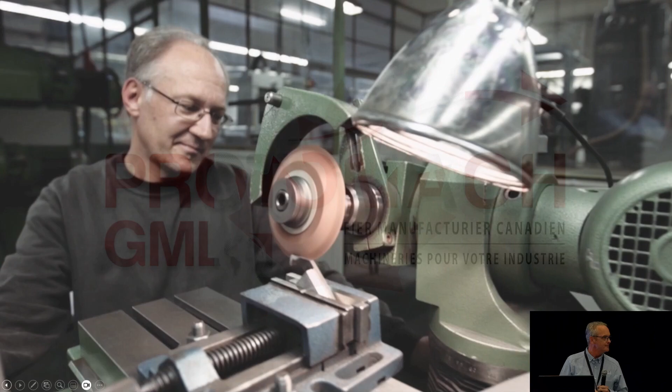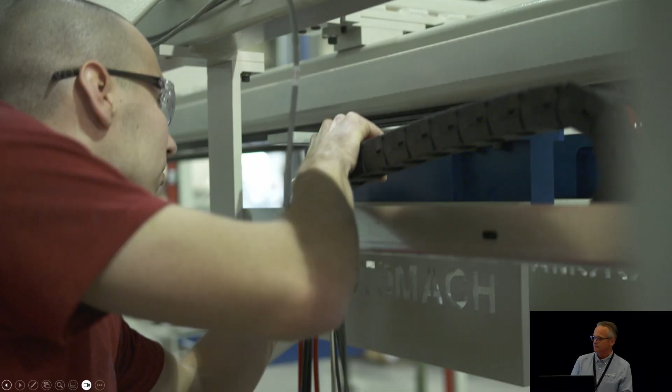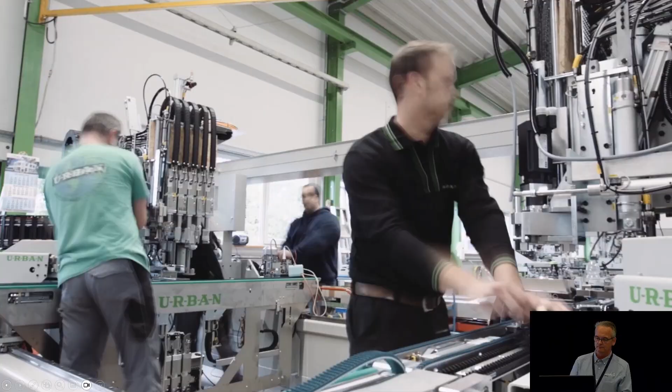We are the Protomach GML team, a proud Canadian manufacturer located in the heart of Quebec. GML's story began in 1984 and Protomach's in 1996. In 2024, to prepare for the next generation, the company became Protomach GML. In early 2010, we were just over 10 employees. Today, we are proud of our growth and now have nearly 40 employees. Partners with Urban for nearly 30 years, did you know that although Urban is a German manufacturer, it has 2 manufacturing plants in Canada, one in Fredericton, New Brunswick, and the other in Cambridge, Ontario.

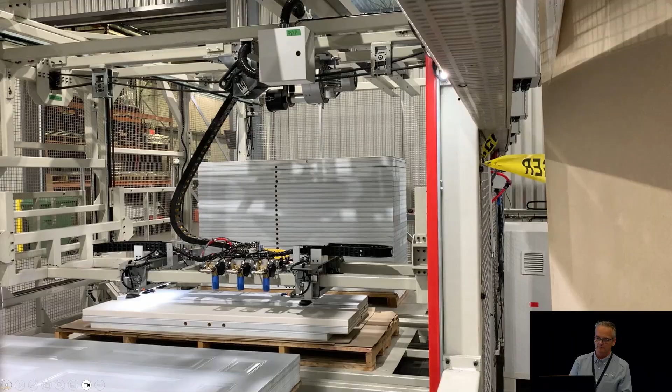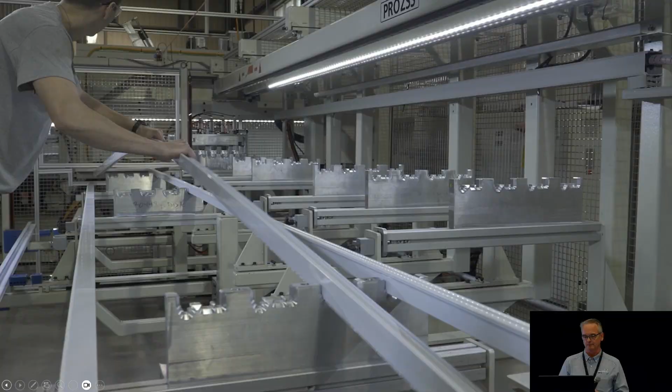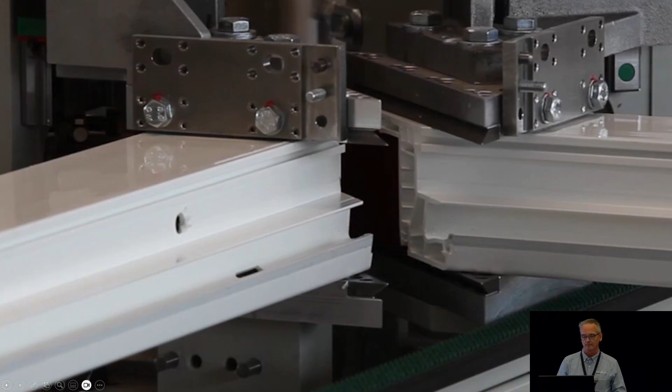We manufacture machinery and industrial tooling specialized in the doors and windows sector. We have the equipment to work with PVC, fiberglass, wood, and light alloys such as aluminum. Industry 4.0 has been part of our operations for many years now. Automation is our everyday reality. We do everything possible to maintain full control over our production. Like you, we cut raw materials, machine them, weld, assemble, program, and fully commission the equipment at our facility. Clients want trusted suppliers who offer solutions tailored to their needs and who will support them over the long term. We don't claim to be perfect, but we dare to dream it. Welcome to Protomach GML, the team that makes a difference.

Okay. Just something I want to talk about. We introduce Urban a little bit in the video because for 30 years we supply Urban machinery. And this video connects with the fact that it's completely Canadian. I'm from Canada, I build machines in Canada, and Urban also has 2 plants in Canada. That's why I'm a part of Urban, and I will say I'm proud to be a part and the dealer of Urban for almost 30 years. It's one of the things I want to say.

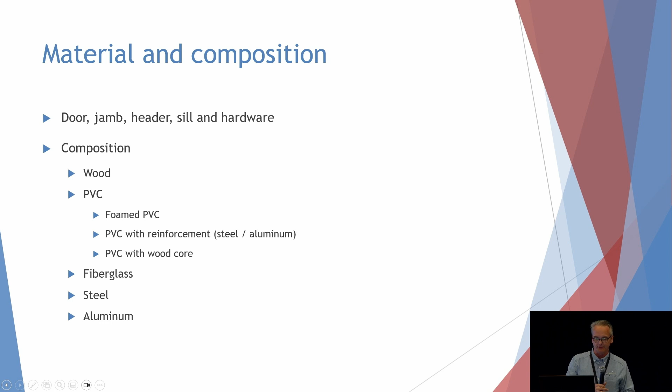Okay, now the material composition of the door, almost everybody knows it: the header, sill and the other way around. The composition we have is wood, PVC, some variation of PVC foamed, reinforcement steel, and sometimes you have wood inside. It's like the wood is there and the mullion coming through, all around, and the fiberglass, steel and aluminum. But that's just for reference for what we will talk about.

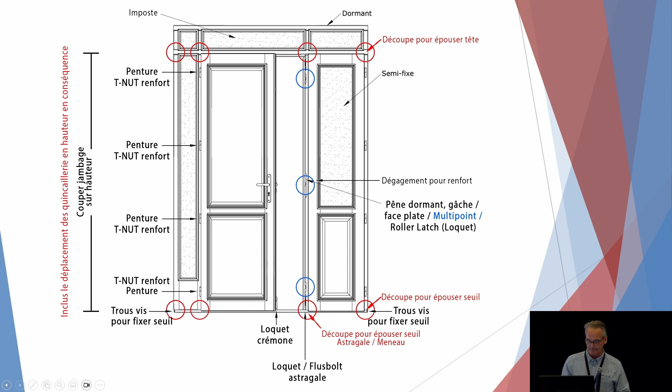We have a small manual machine. It's an online machine we will use. The step-by-step machine is like in the shop, you will have the machine continuously used for doing the door, like the horizontal table, and you will push, or the door can move automatically too. And sometimes on one table we will do two different actions we need on the door, for example doing the installation of the light and switching the door, because later we need to have the door at the opposite side to install the hinges all around, or something we need.

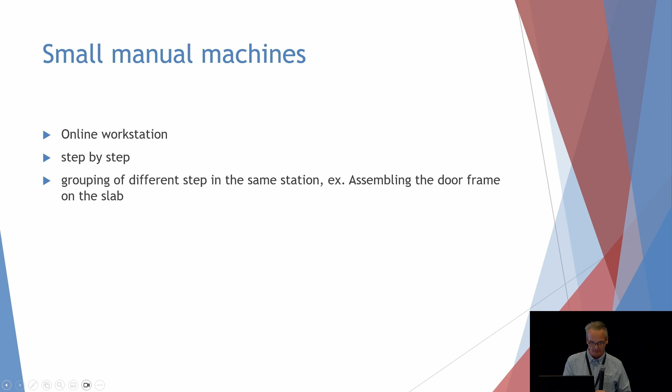Question? It's easy. Yeah.

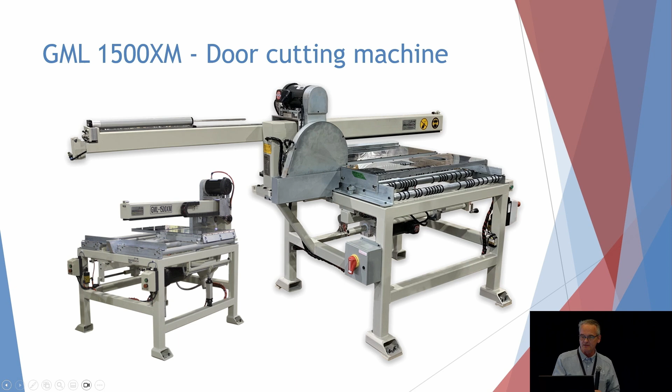To explain the machine now, the machine we have on the screen looks like that. It's one of the machines we build, but this machine probably exists not only from us. The machine can cut for renovation. Sometimes the height of the door needs to be lower and we need to cut. And also you will see under this machine, we have a blade that can cut from the bottom to the head. And some customers do the side light with this cutting option, using the complete door for the side of the door. It's not a feature customers normally ask for many times, but it's an option we have. But the machine cuts on the two sides, the height and the other way.

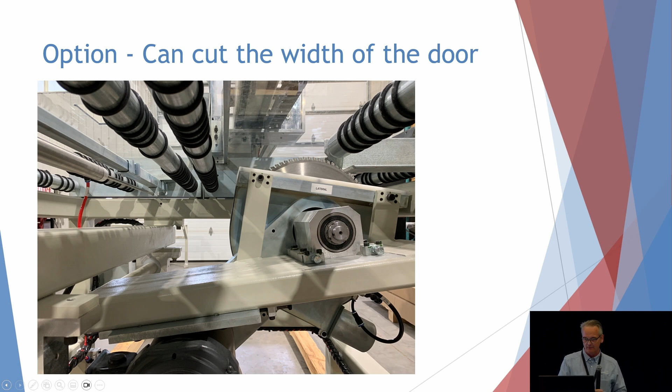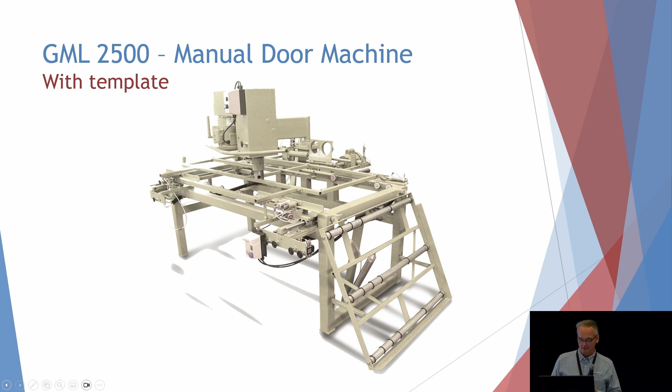But that machine is still in production, but lower production than the other. The other is the GML 3000M, and this is for the slab too. And this machine is like the base machine to do a CNC when we do a machine, CNC at the shop. But this machine is really with the flip stop.

We will push the bridge over and cut the hole for the light, and it's a completely manual machine, but a stronger machine, not with the articulated arm over, and that thing, it's maybe one other option. But like I said, some customers use that, but it's not a big production in 2025, because the need is really different.

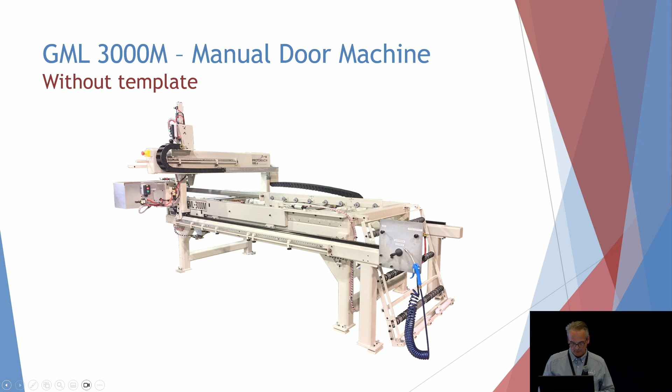And we do some modification for, like you will see after, the positioning middle screw where the hinge is, to be able to have the right spot in the middle. It's like a dimple mark system. We will mark the screw. And this machine will also cut, going to change the tool, have a blade, and cut the height of the door, and continue after.

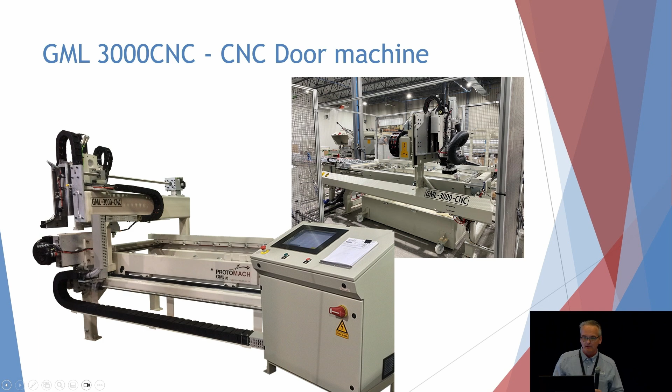And good? Yeah? No, oh yeah, no, I just have one.

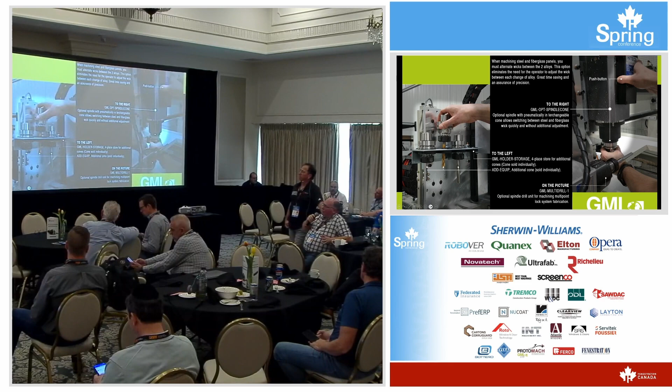When do you want to go to full CNC, Jean-Francois? Is it a matter of just your volumes, or is it what you're doing? When do you start talking to a customer about, okay, you've been doing it this way this long, and now it's time to go all the way up? Normally the customer asking for the CNC already used the 2500 or the manual machine. He uses it, but the capacity needs increased, and he will try to have, like on the screen, the manual changing tool faster, and it's easy to operate.

And when he goes there, the customer normally does close to 5,000 slab doors a year. It's like the number. And I'm proud, because I saw in the exhibition room on the other side the brochure of Novatech, but we have a line at Novatech. We do 210,000 slabs a year on the line. It's a huge line, and we prepare all, but the number of Novatech is completely different.

It's not what the majority of people have, but at the 5,000 number, normally the CNC is a good number, and it's also the manipulation, the paint, and being sure everything's correct, and they have the quality control of what the product is going to come out as, ready to sell, I would say. Good answer? Thank you.

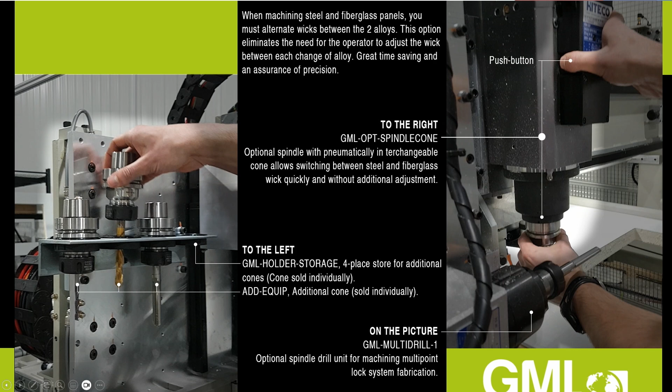Okay, and the picture you have in front of you, we present almost the option manually changed, but like I said, we have an option like a tool changer we can use automatically too. This is the dimple mark for the hinge screw. I can come back with the arrow, with the click. I can change, yeah, back.

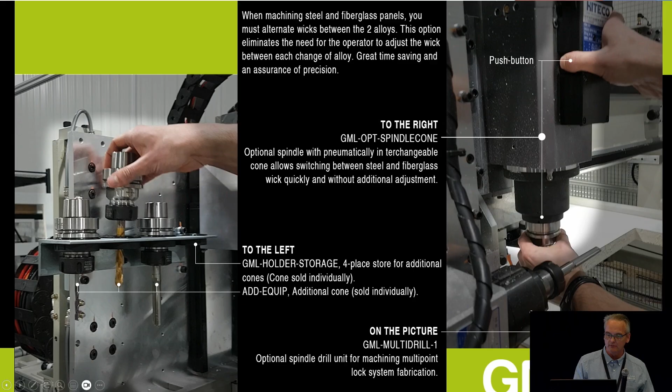Okay, but on this machine, somewhere I would say at the entrance of the machine, I don't see it anywhere. But this system is going to be opposite the operator, and the slab comes through, and you will have a stop. It's like a reference with the bridge we will touch, and the feature will punch on the cavity where the hinge goes, and we will have the center of the screw.

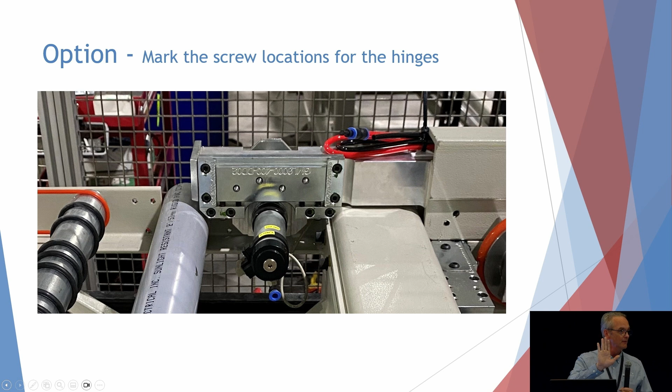Not all customers ask for that, but it's just to be sure the screw is not this way or this way, and will be straight with, I will say, the 82 degrees of the screw, and really flat with the hinge. That's one of the features we have for the hinge. Okay, that thing for me is an important thing.

The machine is a machine, but technically, about the bit, I have many questions, and the customer is trying to have the best and do as many slabs as possible with one bit, because it's not a cheap bit, and he wants to make many slabs with it.

The first one is one flute, but when we compare the upper and the lower, you have the compression one. The black one is because you have a cutting push down on the upper position, close to where the bit will be on the spindle, and down, the compression will pull up at the opposite.

The two pressures will be at the center of the slab. And now, the good option for that is because when you're cutting the plate, it sticks on the urethane, and it will stay, and it doesn't really come through and get loose, I would say.

And the compression bit on the CNC is the best when we use it, and also on the other kind of machine. But sure, when we have a compression bit, on the previous machine before, the manual one, this machine had the oscillating bit going up and down so the wear would change place and give a longer life to the bit. But the compression bit is normally the best for what we need.

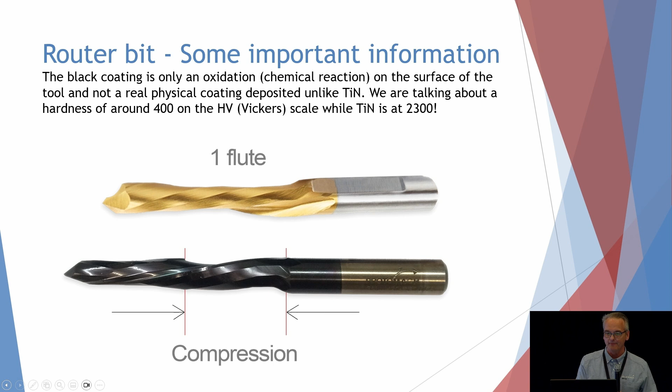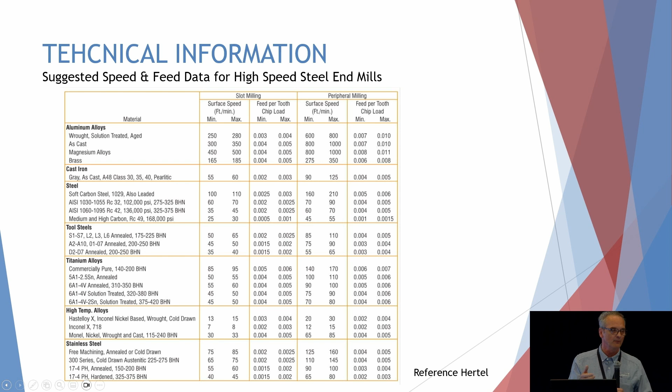The table there is technical, sorry, but at service, when the customer calls, the engineer will refer to that technical information to know what we cut, what speed, what feed, how many inches we will feed in 1 minute, and it's the table we normally refer to for taking the decision. It's referred to the list of titanium or compression bits, but it's one of the lists we use.

We compare. TiN is titanium nitride. TiCN is titanium carbo-nitride, and TiAlN is titanium aluminum nitride. And we will see how much speed we can increase on the machine. That's another rule we use when we set the machine, because on the CNC, either the machine will decide, or we will decide at which speed we go.

Also, the difference we can have is sometimes the thickness of the steel changes on the batch. Sometimes the customer calls and says, normally I do 150 doors with one bit, but I do 110. So we ask him to take a caliper and give us the thickness of the steel. Another thing is when he's cutting really close to the mold on the steel, because it's formed. When we are half on the flat and half on the angle, the parameters change, and sometimes the bit can have a shorter life than it's supposed to.

Now we will see the best, but the thing is when we increase the percentage, the price increases too. We cannot use a bit at $500. It's a limit, but we decided to refer the customer to the first one, the titanium nitride one, at 25% more than the black oxide, and the ratio of how much we pay to how many doors we do a day. That's the best way we normally use.

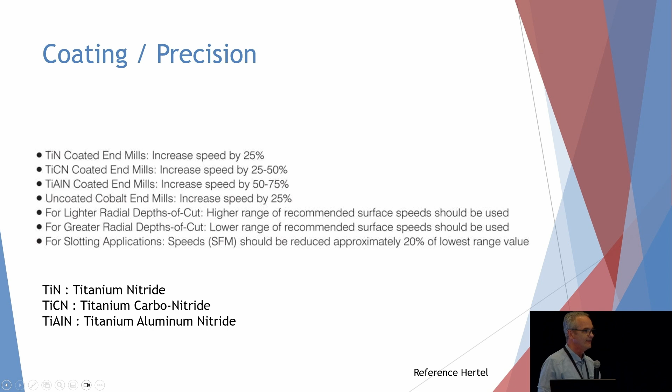Jean-François, yeah, another question. So getting that wrong, right? Getting the shape wrong, getting the coating wrong, getting the speeds wrong. What are the... You mentioned tool life.

That's going to be one effect, right? Yeah. Is that going to mess up your cut too? If you don't get those things right, what happens when you don't get these factors correct on your system?

But you're sure you'll do 4 doors with one bit. Right. Yeah, you could really blow away your tool life.

The numbers come down very quickly. On the machines we build, we normally fix the speed because we don't want the customer to play with it, since that's one of the things that makes them call the shop for help. But sometimes customers ask for more access to the machine's parameters.

We need to fix certain things and not really change them, because we'd lose control. We'd end up playing back and forth with the customer for a few weeks because they're adjusting numbers like the speed, or the RPM of the bit, or a mix of those.

But if these parameters get far from the rules we use, the number of doors you can do is going to be a disaster. The bit will cost the same, but that's not the only reason.

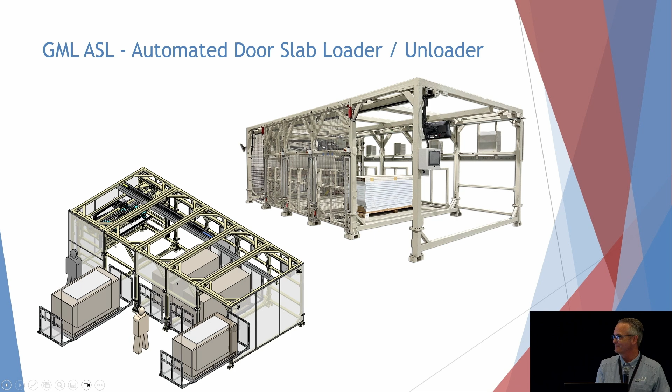The output, okay. Okay, I ask permission because I'm proud of it. Sorry.

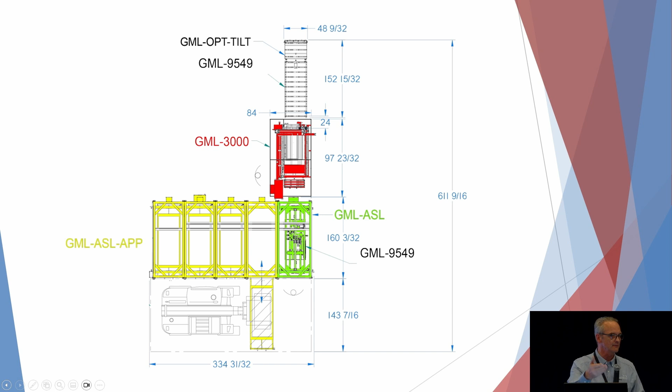Okay, and the line looks like that. It's like a floor plan, and the system will go through it - the yellow part is the vacuum system. The machine is in red, and the exit is at the upper position.

This is a new part of the conference. Is it too slow or too fast? That's good, you're good.

Okay, that machine is to prepare the jamb. The jamb will be the place for the side of the hinge, and also the side of the lock and handle.

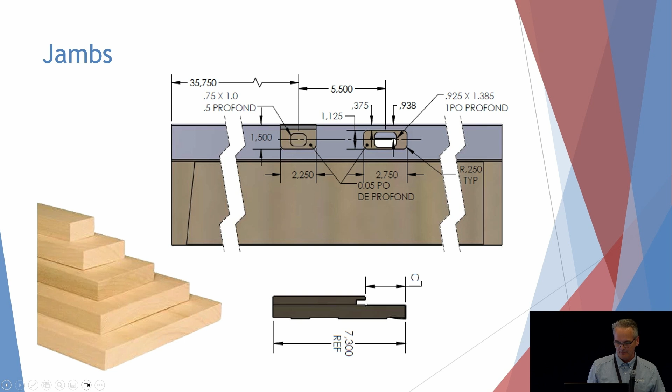This machine is really simple. Reference left or right, and you have the lock or the handle faceplate with a router that manually does the routing, ready to install the screw, and that's it.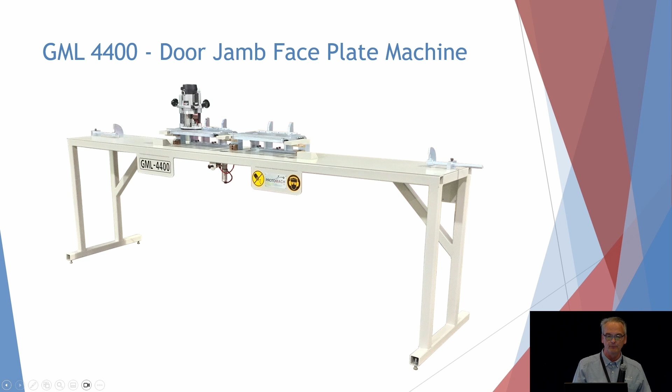Under the aluminum beam, the piece of wood will raise up to touch the upper position, making sure we route at the right dimension for the thickness of the hinge. If the jamb thickness changes because it's wood, the reference position will route at the right depth to keep the hinge flush.

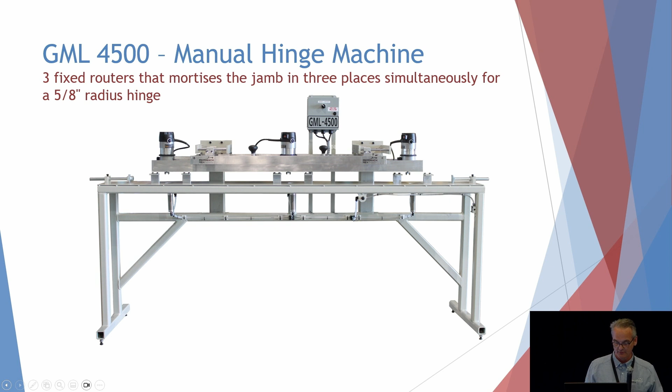That machine is really fixed at 3 inches, but we don't sell many of those. The more popular one has 4 movable, adjustable routers - you can use 3 or 4 depending on how many hinges you put on the slab or jamb. It's a more adjustable machine for a wider market, for doors at 96 inch or 79 inch too, but that's almost it.

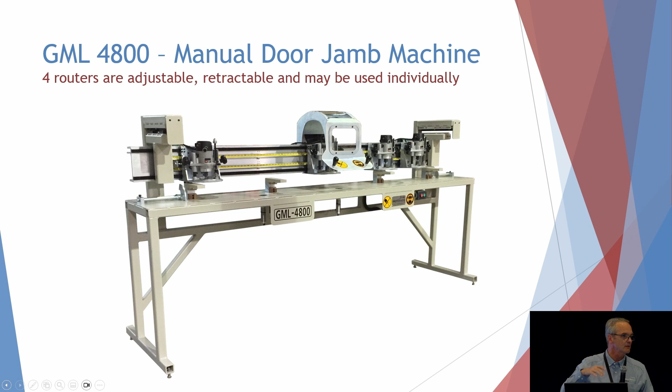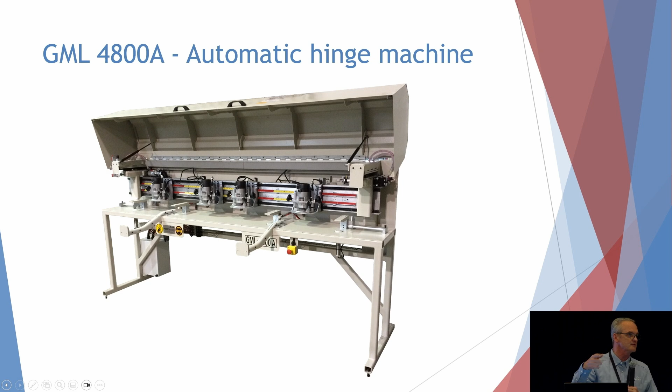That machine is close to the same as before, but it's numbered for automatic. That's because we put the jamb on. The cover is completely closed, but we put the jamb on, and when it's finished, it will eject automatically and ready to install the other. It's faster because you always have one in hand, and while you extract one, the machine continues with the other. You just remove it and continue - the machine is faster for insertion and extraction.

We have some customers asking to have the machine put the slab and also the jamb. On that machine, in the lower position where you have the black handle, the slab will be vertically there. This mechanism will go up and down depending if it's a door at 36, 32, or 30 inches. You push the slab on, and the upper position will fit with the router, and on the back you put the jamb.

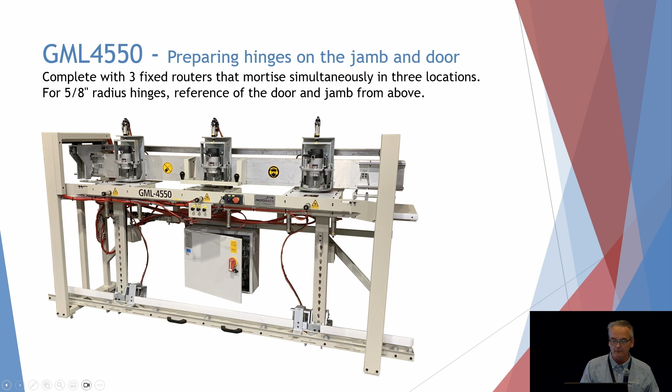When you route the hinges, you route the slab door at the same time as the jamb, and it will fit really straight, sure. I have something like that, you will see - the two routings done at the same time. The machine will go back, and you have enough room to screw the hinge and pull it out after.

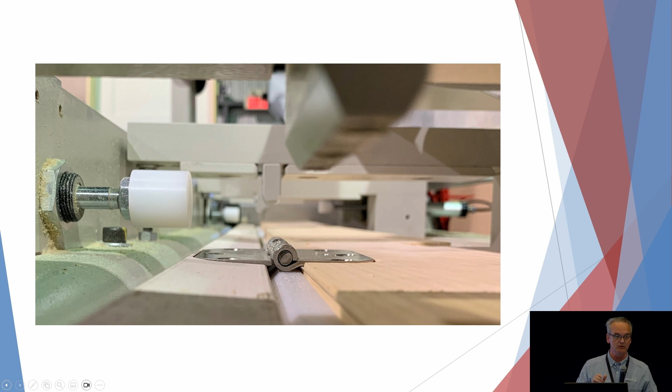It's like a manual option that accepts to do things faster than some operations you would do in your shop, because sometimes the installation of the hinge and the jamb isn't on an ergonomic table that's easy to use for screwing. It's not automatic, it's a manual machine, but it's faster than probably some options some customers use.

Sometimes we'll put the two jambs left and right at the left position because the fixture and clamping system fits with that. On the right side you can put the astragal or the sill, and sometimes the aluminum sill, because on this machine we have a capacity for 4 spindles - but we put one with the router to accept machining aluminum.

Because with aluminum, we need to rotate the side to accept it. Sometimes when we also have the post in the middle, we turn around and need to make some machining there. But you can play with it - you can do 2 jambs left at the left side, 2 right at the right side. You can arrange it depending what you wish to have, the capacity you need, or the style of production you have or the process you normally use.

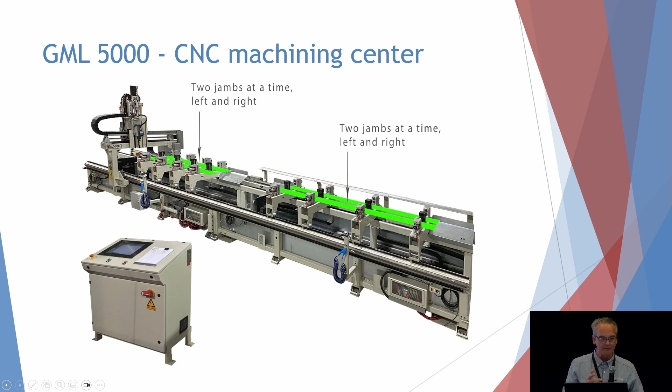The machine can also be used on one side only, working with the tandem on just one side, but the machine can be modified later - if production increases, we can add a longer section to the existing machine, giving it a second life if you need more capacity later. We also have the option, if the capacity needed is really high, to have 2 bridges over and play with left and right really fast - bridge right does right, bridge left does left, or the 2 bridges are both on the left side at the same time, or the other side.

But the limit is the need you have and also the investment you need, because if we're talking 10,000 slab doors a year versus 3,000, it's not the same, and we need to make the good choice to have the good return on investment. That's right, okay.

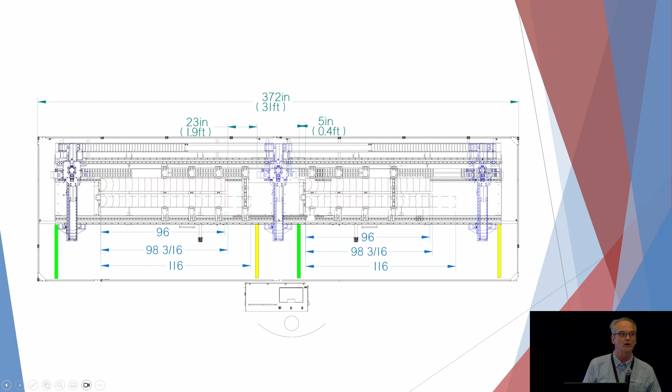Choice of material. The machine doesn't have to be run manually - more CNC machines can use a barcode scanner. We can have the production sheet directly, put in the number, and do the job. The machine can also be used manually, but you have other options depending on where you are in your shop. Sometimes we come with the CNC machine, but the system isn't ready to use, so it starts manually.

After the barcode scanner, we also have the CSV file. We can go directly through the server, pick the serial number of the part we need to do, and it will have the recipe of what we need to machine, and organize and do the job. With the CSV file, say 20 lines, it goes through line by line, step by step, and the machine will do the machining.

I have a customer, Daniel, who told me about this - a customer has an internal system. Beside the machine, he has his own computer. The machine gives us the barcode, the QR code, only on the label. The internal program he uses will scan the barcode and refer to the database to give information to the machine. But it's not only to give information to the machine - with the system, when he scans, he knows exactly where the production is now, whether at the beginning or at the finished position. He can refer to where it is. But we need to work with the customer on this, because sometimes we have reference people to handle that. It's sure such a system exists - just wanted to let you know.

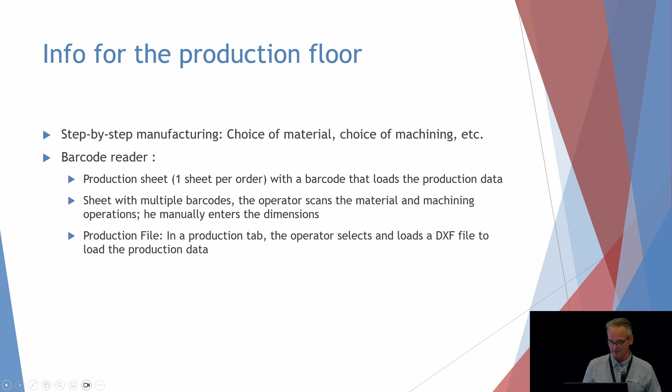Assembly. Manual table - no air, no electric, nothing. It's only a table that flips with a pulley system, using weight and counterweight to balance. This yellow part can adjust left and right - you pull on the left and the other side moves away, connected together. You have a place to put your jamb, assemble your frame, screw on the corner, flip it, and it's out. It's a really simple machine.

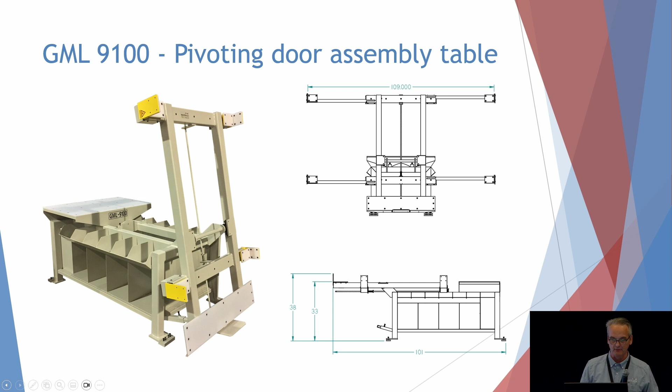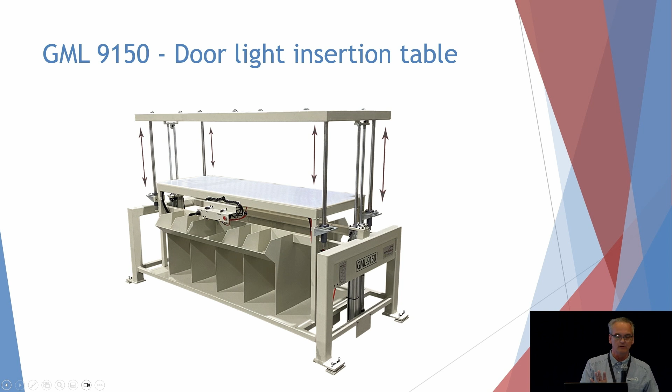This machine is almost the same, but it has a flip. You see on the left, close to the yellow place, there are 4 bolts. This system raises, you can flip the door and bring it down after, and when needed in the process, you flip the door because the line needs to be on the opposite side. It's a light machine with a flip.

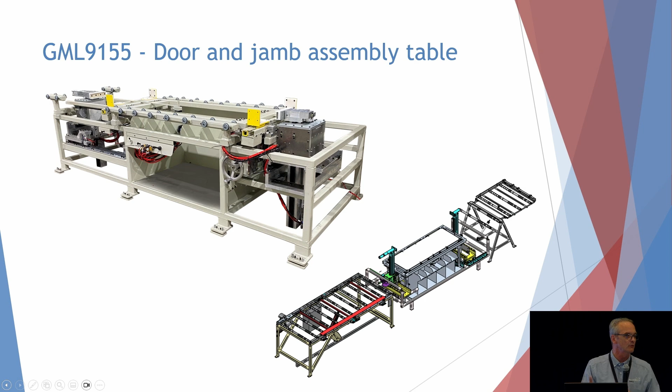You'll notice on the side we have a bin for hardware. Sometimes the customer needs to put some stuff here and grab some hardware to install if needed, like screws - it's like a working station.

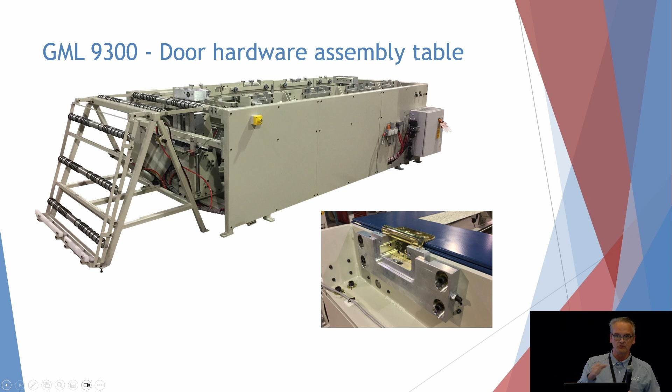That machine has a flip - no, it's a hinge machine. You see the down right picture - the jig is there, the hinge fits, and you put the hinge in and screw it. But the feature we also have is the flip is still there if we need it. The other thing is you also have the option to raise the door to an ergonomic position so it's not too low - you push the door to a position comfortable for screwing the hinge.

Just a quick question - so multi-point hardware. Do you have, I don't think I noticed that - did you mention that at all?

I'm not sure - multi-point hardware is definitely close to the CNC, or the manual machine that looks like the CNC. We have a feature that can rout the bolt on the side, but manually it's okay, though it's labor intensive because it's really deep and you go back and forward. The bit cannot accept more than, say, 1/4 inch or maybe a limit of 1/2 inch deep, left and right. But the best setup has a good depth, and the depth is decided by the operator. We did some tests.

It's possible, but definitely the multi-point on the side of the door is done on the CNC. We have a tool option directly on it, and the router will go through, do all the machining, and clean all the side of the door to accept it. And sometimes with the multi-point we have two references up and down, but with some hardware, the door is like that, and we have a space of wood before the edge of the door, but the other one is completely open.